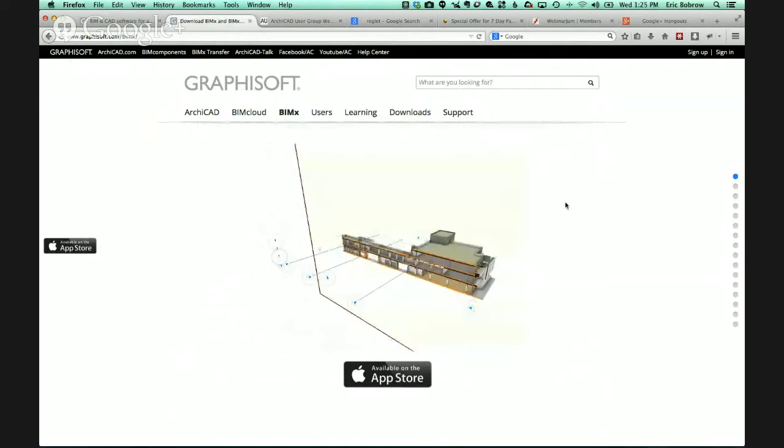I think here in the US, we're not going to go anywhere fast. In other words, we're not going to lose a lot of people and we're not going to gain a lot of people fast. But over time, I think we actually have real potential to grow and become a much stronger presence here in the US and worldwide. There's no question Graphisoft is doing just fine.

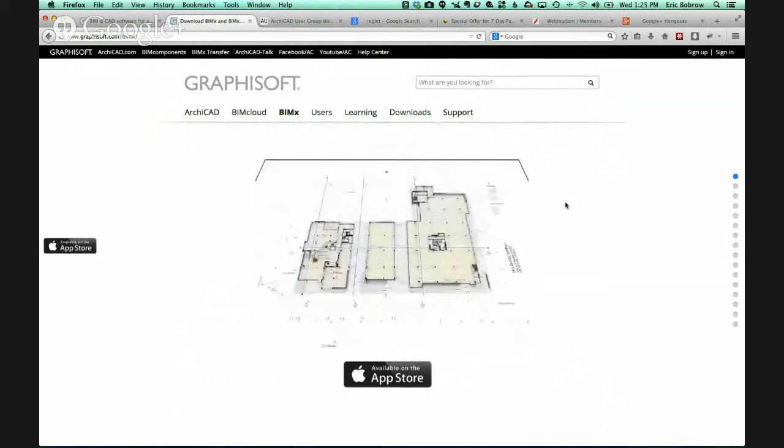If you compare them to car companies, they may not be the Toyota, the number one mass market one, maybe you'd say they're the BMW or something like that. It's not a bad position to be the elite or the best, even if not everybody uses it or can afford it.

And I don't think there's any direct comparison. Are we the BMW, the Mercedes, or what company are we? Even in terms of operating system, are we the Mac to Windows, with Windows being the dominant player, but Apple now being seen as a more successful, innovative company than Microsoft, at least by some people. I don't know.

I don't think you can make a direct comparison, but I think all of us, if we hang in there together and take advantage of what ArchiCAD offers, we're going to have a great journey and be able to serve our clients and create great designs with this tool. So that's my take on it, and maybe a little bit of inspirational talk.

Now let's look at... Oh, I see a comment from Kenneth: I've used Revit and switched over four years ago, it's the best thing I ever did. Well, that's great, thank you Kenneth.

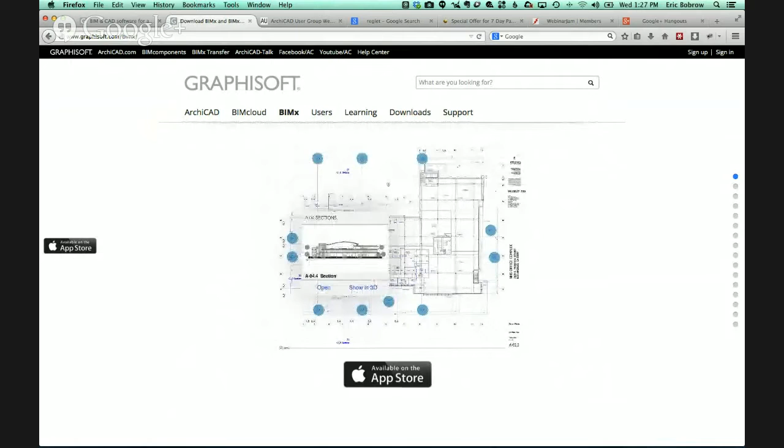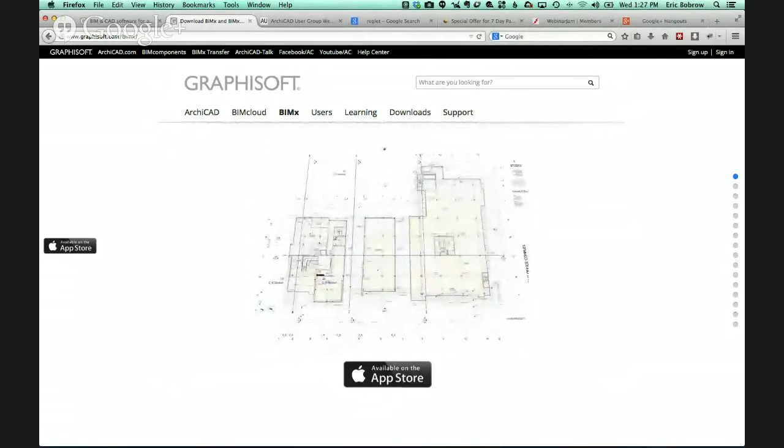Another question from Gordon: there was a note on the install of version 17 that it would be the last version to run on Snow Leopard. Will that be the case? I believe so. If you're a Mac user on Mac OS 10.6, Snow Leopard, version 18 will not run on that. In fact, I'm not even quite sure whether Lion, 10.7, is supported - I can't remember about that. So you'll have to check the Graphisoft website to see the requirements.

But fortunately, if you're a Mac user with a reasonably modern machine, the upgrade to Mavericks, the current Mac OS, is free. So literally, if you're on Mountain Lion or Snow Leopard, you could just download and install the current operating system. So that shouldn't be an obstacle that way. All right, so let's see.

Got this, the ArchiCAD thing here. Let me just put it back to the main one. I don't want to have this animation running in the background for too long here, so let me just switch gears to the ArchiCAD user group website.

This is something that I set up without a lot of fanfare back in maybe February. It is a resource that is free and will always be free.

The front page shows the most recent stories on ArchiCAD. I've been adding references here whenever I notice a story about ArchiCAD, but if you're logged into the site, you can submit a link yourself. If you click on submit a link, it'll just ask you for the link, you click submit, and then it'll ask you for a few details.

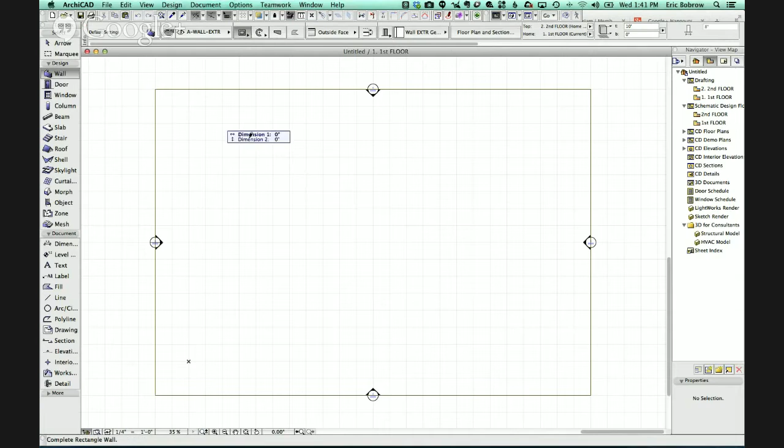Let me just go and bring up ArchiCAD here. We've got just an ArchiCAD empty file, new file here. I'm just going to draw a box and put in a window and a door, and then I'll go to 3D and take a look at it.

He's asking about putting in a reglet, which is a groove in the wall, often used for flashing. So you create the groove in the wall. Right now these walls are just made out of generic materials, but might be masonry that you're carving the groove out of, and then you install the flashing in many cases into that, so it has something to hold on to and be glued or adhered.

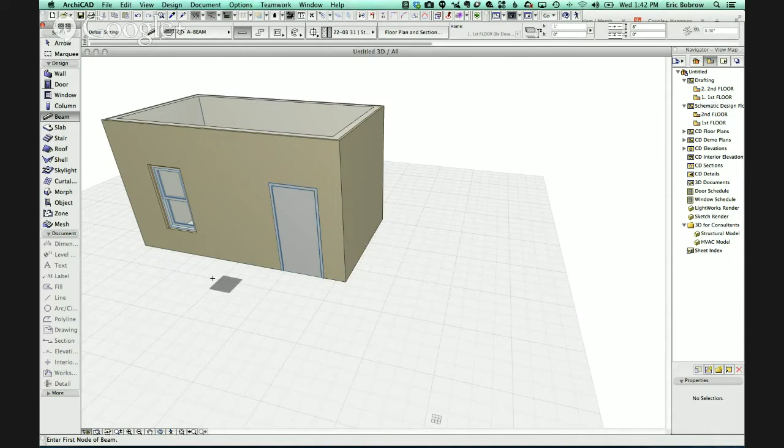So how would you do that? Well, the obvious answer for me would be solid element operations. We could create an element out of a variety of tools. Now I'm going to use the beam tool, and I'll just demonstrate. First, if I draw a beam on the floor plan here and move this, let's rotate this around, and I'll drag this horizontally. Now it's starting to overlap the wall, and then I'll drag it vertically here. Now it's sticking into the wall.

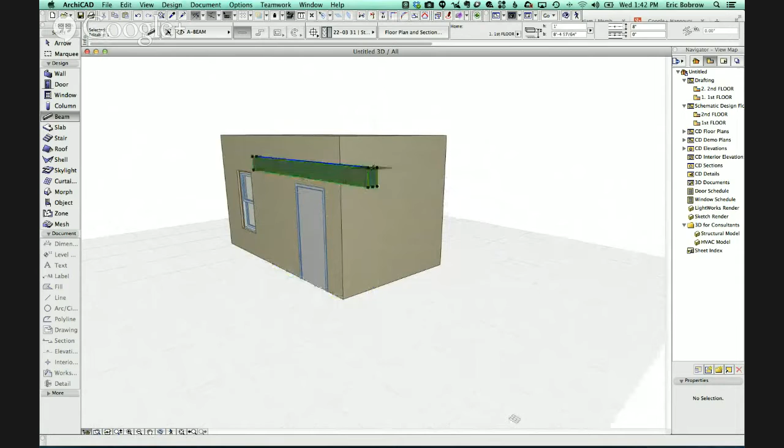Okay, so now this beam, what is it made of? Well, I didn't pay any attention - this is a new file based on the ArchiCAD template. It's made out of structural concrete. Now in ArchiCAD 17, building materials have priorities, and therefore structural concrete is certainly a very hard surface or hard material, and in general is going to be stronger than many other things, so it's probably going to be stronger than these other materials here.

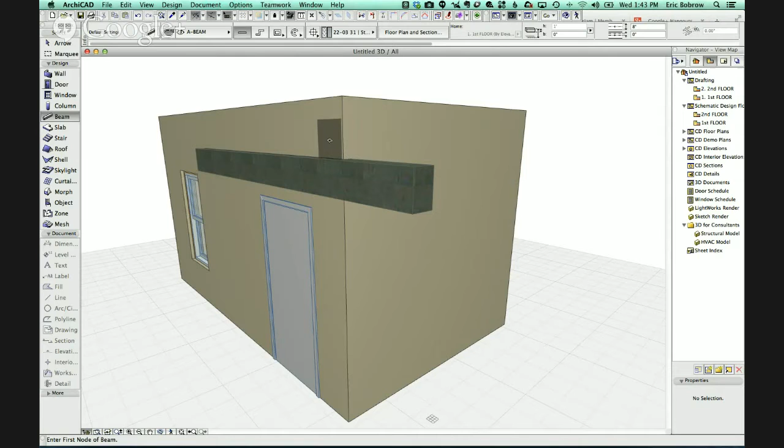So what does that mean? If I select this and rotate around, you can see the green line just faintly passing through there. It's actually sticking through the wall. Now if I select the wall, on the other hand, you can see the green line is cutting itself around.

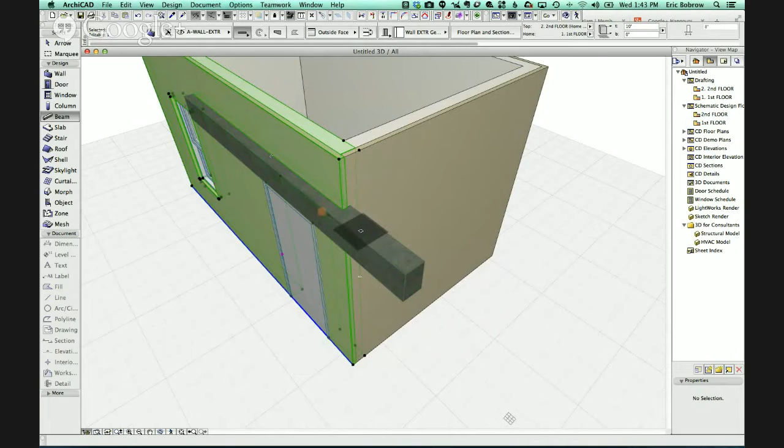So there's a hole in the wall. Now, of course, we're talking about a groove, not a bump out or something sticking out. So what would we do? Well, if I do this, it creates a groove or a hole. If I delete it, the hole goes away, but I could go and hide this layer.

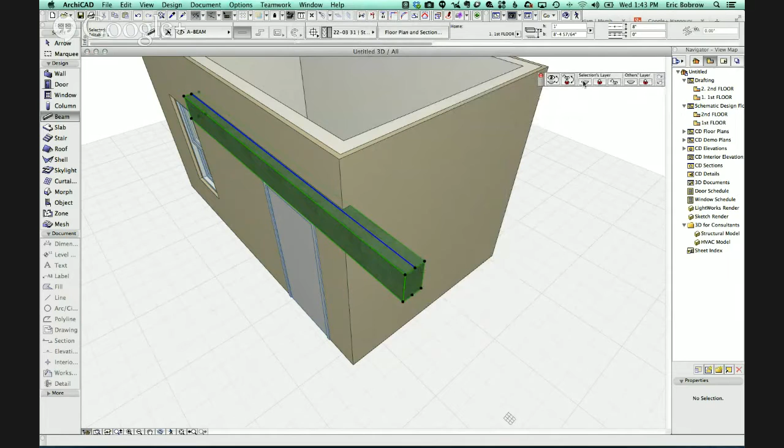So let me go to the window palettes here and use quick layers. Quick layers is one of my favorite tools here, and let's say hide this layer. You can see there's a groove.

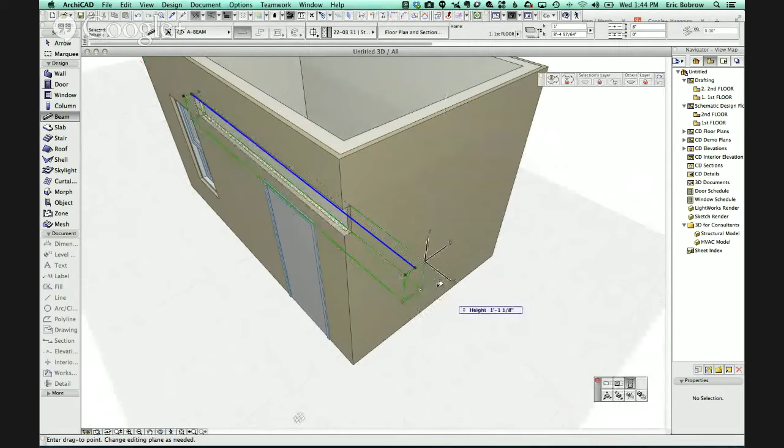Now instead of hiding it, if I undo this and go to the layer dialog and make that layer wireframe, then we can see through it, and that means I can easily select it and change, perhaps change its height, maybe make it shorter. Let's say 1 inch here, and also change how wide it is, make it narrower, and now you can see that we've got this groove in the wall here.

So in ArchiCAD 17 you can do that with the beam tool and then just hide it instead of having it in wireframe. If it's a simple little groove, that's perfectly sufficient, and you can put them around the building very, very quickly.

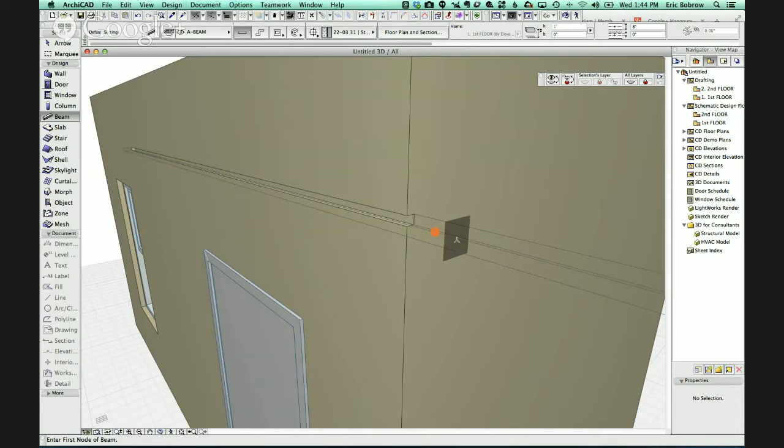Now in previous versions of ArchiCAD, the beam tool has a priority that you can manually set, and so by changing that priority value, you may make it stronger than the wall, and then it'll cut a hole in it.

Now the beam can be rectangular like this. Of course, beams can be other shapes. We can pick a shape. Here, this is a custom shape based on the current size, but I could pick something else. Let's pick one.

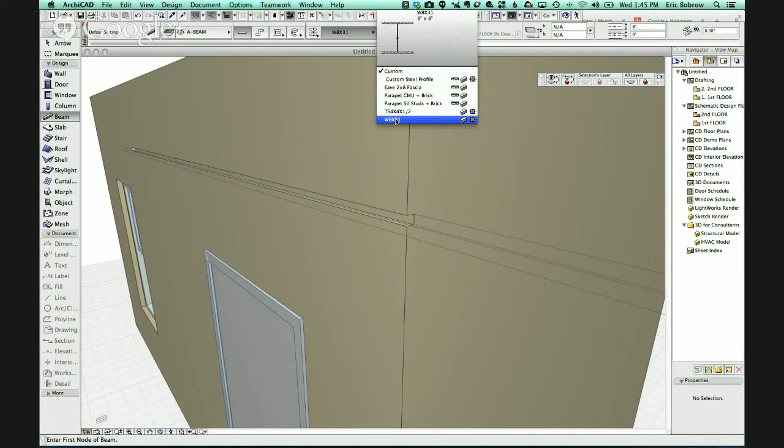Now here's a piece of structural steel, and you can see... Oh, actually, I have to select this element, and then I can change that. Now you can see that it's got two grooves.

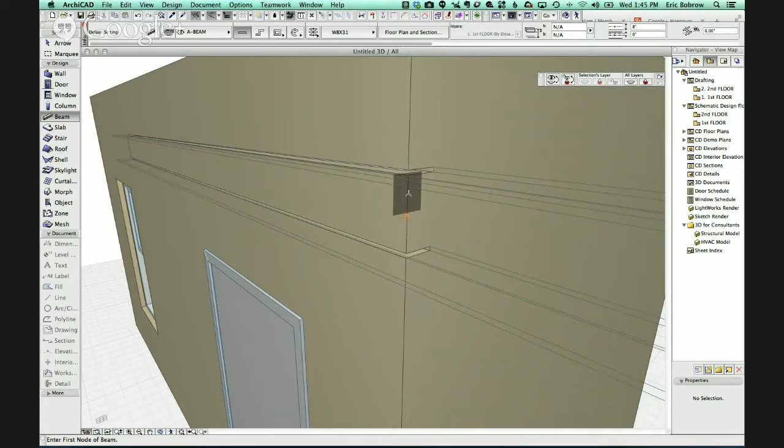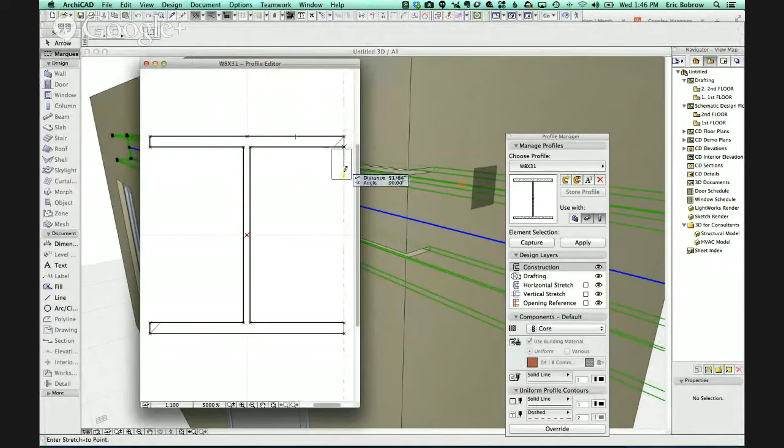So if we select this and edit the complex profile, we could literally change this. Let me just do something arbitrary—I'm going to drag that down and drag this up or something like that. So I'm doing something really arbitrary here, but let me apply it. This is the new shape, and you can see how the groove is now a different shape. So basically, using complex profiles with a beam would probably be the simplest way to accomplish what Jack was asking.

So I hope that is clear enough. I see a comment from Jonathan: make it a horizontal pipe.

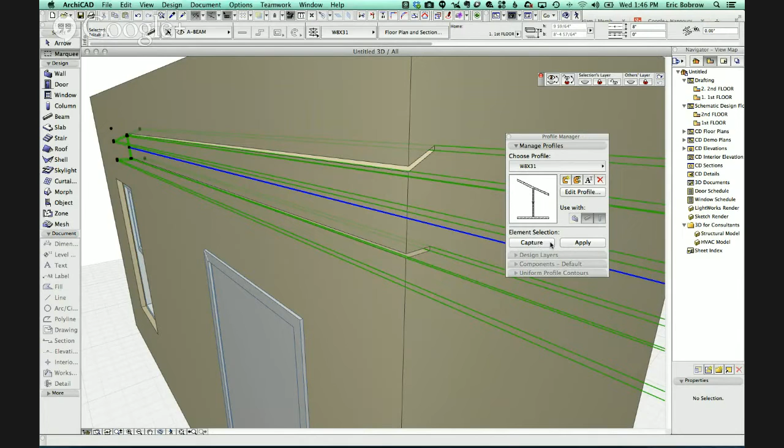So in terms of a pipe, if we were to go edit that profile, let me just delete everything here in the profile, and let me do a fill. Actually, let me do a circle here. How big do we want this? I'll just make it a 2-inch diameter.

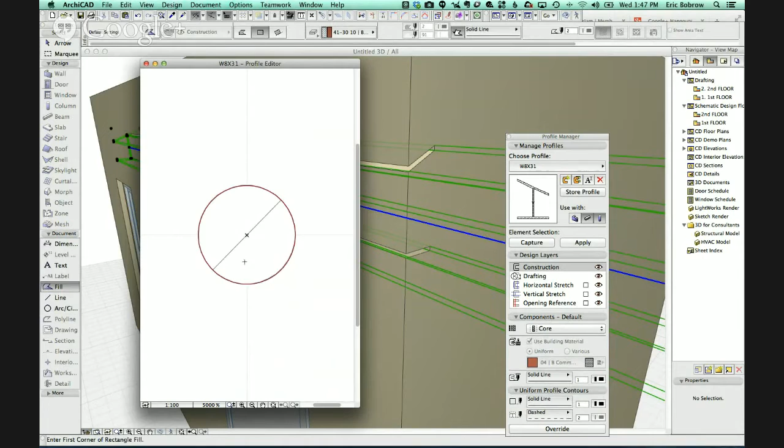Now, as a 2D element, it won't be seen, but if I fill it here, and this is now filled, and I designate it as something like concrete, now it's going to be a solid, and I'll just store this. You can see how it's changed, and now you can see how it's got a curved shape. And we are seeing the facets in the beam itself.

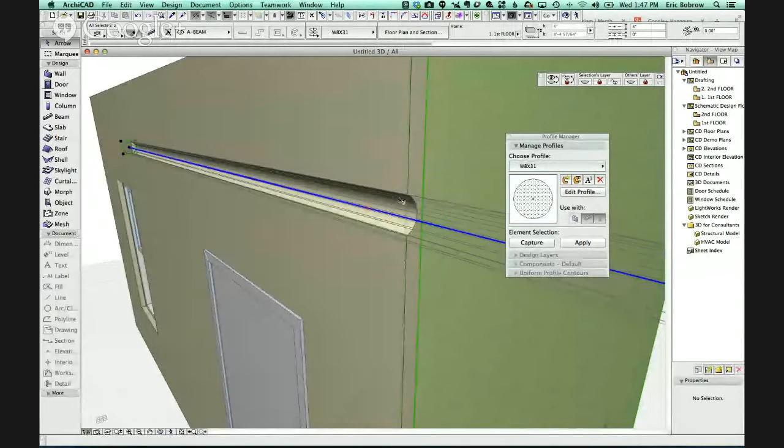But as soon as we hide that—whoops, let me undo that, I guess I had more than one thing selected. Here, select that, hide it. There you go, you can see how smooth that is. So I hope that answers this.

Ken writes, Eric, I think you wanted to go both vertically and then horizontally, again at a different height. Well, obviously you could create other things like a column going vertically. So the idea is you create something that's going to cut the hole, and then you either use the building material priorities in ArchiCAD 17, the manually set intersection priorities for beams in ArchiCAD 16 and earlier, or solid element operations under the design menu.

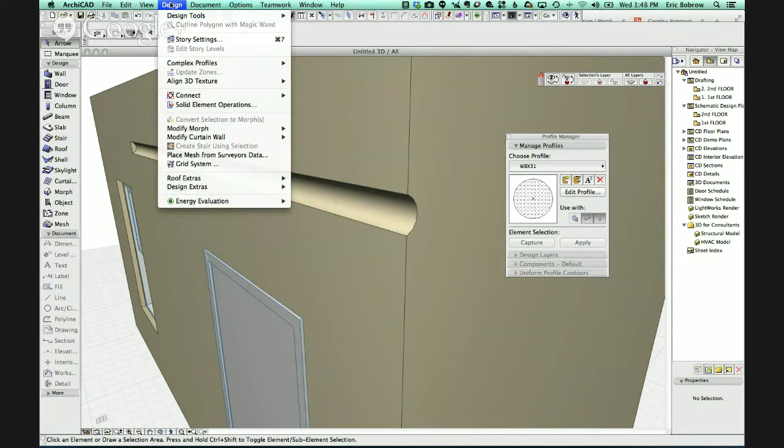If you're going to do any other things, you could take any type of element, a morph element or an object, and create that. So I need to do quick answers here because I want to cover a couple of other things in this session, and then I have some final announcements, and try not to go too much over an hour.

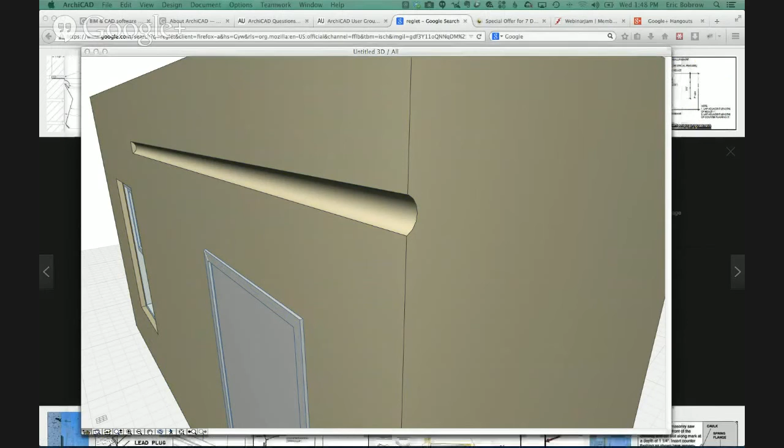Okay, so we have a question from Ben Jacks. Ben is a new ArchiCAD user, and he is actually a teacher at University of Miami in Ohio, I believe.

He says, I'm struggling to understand some essential things about layers, views, layouts, and publishing. I'm in way over my head, and I don't understand how layers work and how model view options work, and why certain things show sometimes and not other times. There's a lot of options and controls that interact in ArchiCAD that can be confusing.

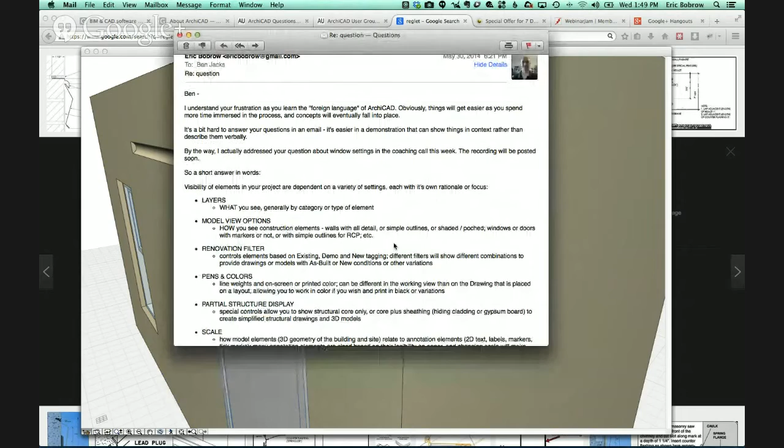So I took a little time to write a short answer, and I'm going to post this on the ArchiCAD user website. Even as a relatively proficient user, you may find this useful as an overview. I'll just read these off and elaborate a little bit on what I wrote.

Layers control what you see. So you can turn on and off groups of elements like all the furniture or the landscaping or interior walls based on layers. They're categories of elements, and they're flexible because you can assign any element to any category.

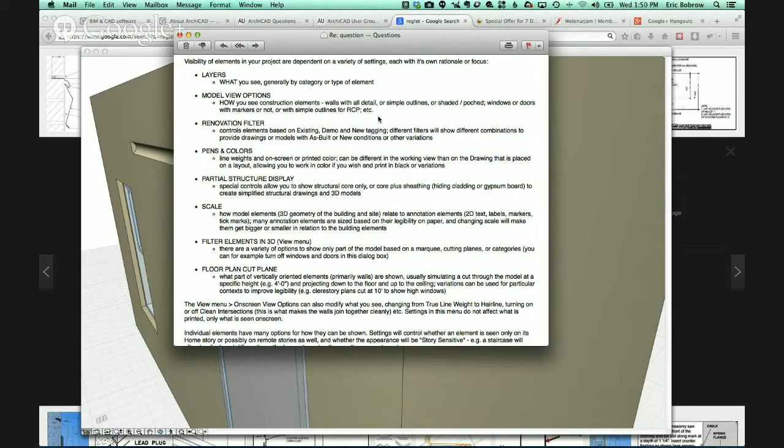Model view options say, how do you see them? So if the walls are showing, are they showing with a lot of detail, or are they showing as just simple outlines or shaded? And windows or doors, if they're showing, do you show them with markers or not? Things like that, or simple outlines for reflected ceiling plans.

The renovation filter allows you to choose elements to show or hide based on whether you want to see existing and demo elements or existing and new, so different phases of the building. There are some options for overriding the normal look of things to make them stand out, so you can have demo elements with dashed lines or in 3D colored in red or some other color.

Pens and colors affect those elements that are shown. It affects the line weights on screen and when you print. You can have a different pen set that you're working with in your model than in the documentation, the drawings on the sheets, because you can work with colors in the model since it's convenient to see different element categories in different colors. But on the sheet, the drawing, you can override that and say I'd like to have all of the pens in black, or the main pens in black and others in color.

Partial structure display allows you to change whether structural elements like walls, slabs, and roofs will show entirely, or you'll only see the structural core, or there's a supplemental or intermediate view where it's taking off the cladding but leaving the core plus the sheathing. This helps you communicate with your engineer to create structural drawings or structural models, because they don't want to look at the exterior or the non-structural stuff.

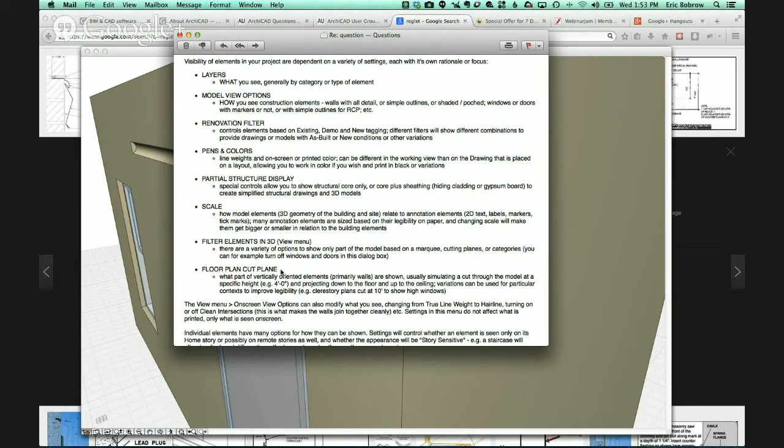Finally, at least on my list, the floor plan cut plane affects how the model looks on the floor plan, because usually you want to cut at, I'll just say chest level—4 feet or 1 meter or something—but sometimes you want to show the walls up high, like in a clerestory plan, to show the high windows, so you can change that. Or if you have split level conditions, you may want to show different cut planes in different parts of the model.

Separately from all of these, which affect what you see and what you would print or plot, the View menu's on-screen view options also modify what you see. You can go from true line weight to hairline, turn on or off clean intersections, and other things. As the name implies, they affect only what you see on screen, but not the output.

So even if you have true line weight turned off when you're looking, if you print, it will be with the weights. There's a separate control when printing to say I want to print in hairline, which is useful if you just want a quick printout to mark up.

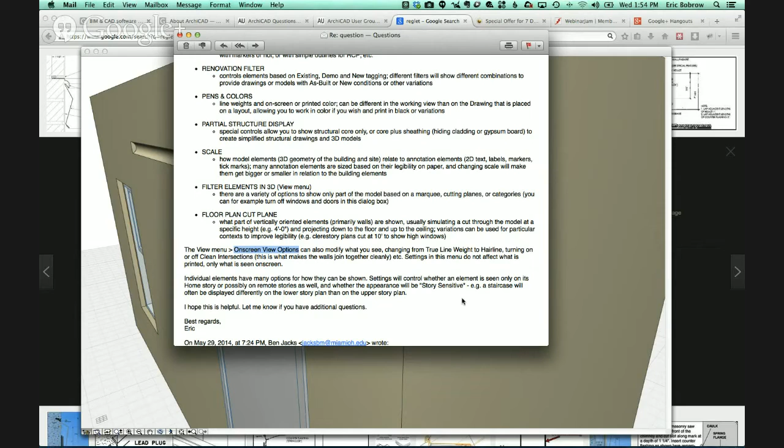Now, individual elements have controls. Of course there's the general settings of how big they are, and what element they are, which object this is. But there are also controls related to the pens, which give you the thickness of the lines, and more sophisticated controls such as story sensitive. A staircase will be displayed differently in many cases on the lower story, where you might have a break line, than on the upper story plan, where you'd see the entire staircase.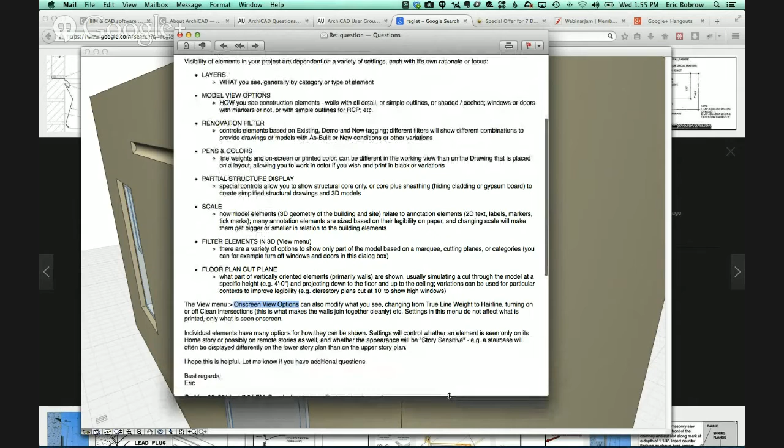So this is, in a very short summary, all of the things that I could think of that affect what you see and what you print from the model.

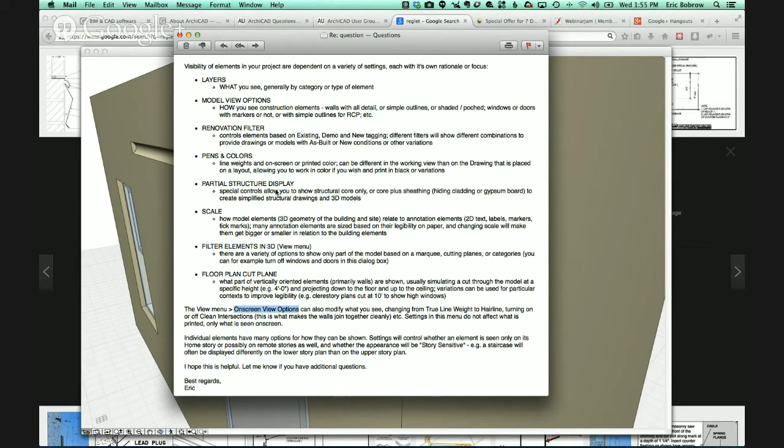Now, if you think about it, we just use these in context. When you create a construction document of the floor plan, you have certain layers turned on, certain model view options. You're choosing is it a demo plan, a new plan, or existing. What pens and colors—probably most of your drawings are going to be one set of pens and colors, but if you're doing a special purpose thing for an engineer, you change it to show the core of load-bearing walls and things like that. So all of these things we just use in context.

But where this can get confusing is when he wrote here, I've been completely baffled because I had some lines on that layer which did not show up on the furnishings view, even though other lines in that layer do show up. So he was saying, I can't see certain lines—how'd they get turned off?

Well, it turns out that the lines he was referring to were inside the walls. They were skin separator lines, and when the furnishing plan views had the option of presentation solid selected, it meant the walls were shown in solid form. Actually, as I read this again, that's not exactly the case—he did have presentation solid selected, but the lines themselves were not from the walls.

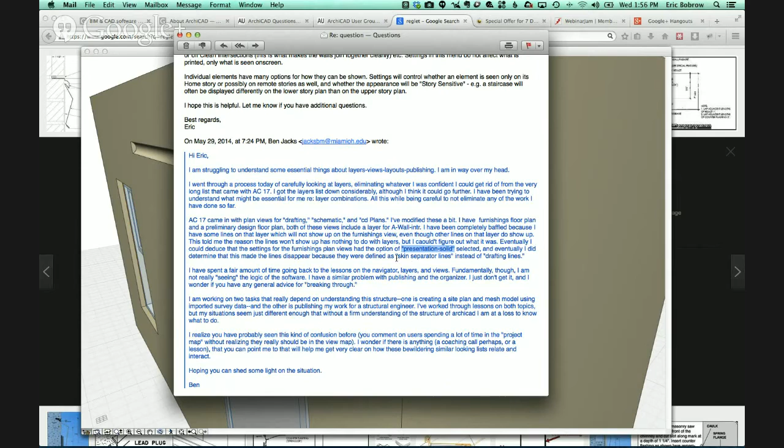They were separate lines, and this is a tricky thing: if I draw a line, I can choose what category it is. This is really odd—why is the default a skin separator line? I just opened up a new project with the standard US template, and I would think the better default would be a drafting line. A drafting line will always show as long as its layer is turned on, whereas the skin separator line can be hidden.

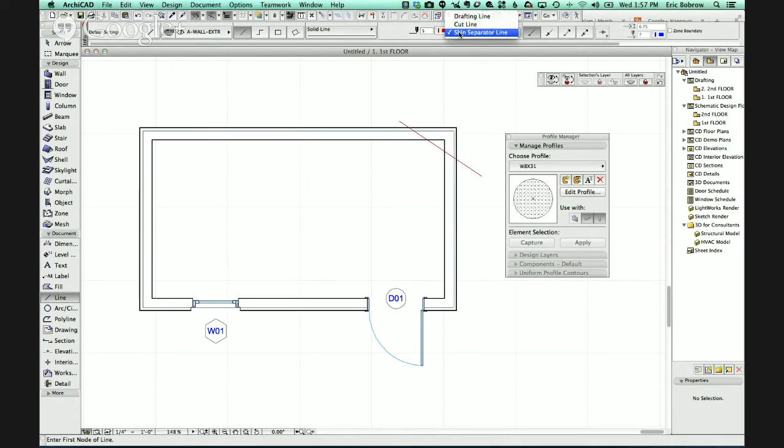So if I draw two lines—I'm just going to draw a line here, then switch to drafting line and do this line here. Zoom in on it, switch my model view options, open up our quick options, and switch this from drafting plus fill to presentation solid. You can see that the walls now are shown in solid, but hey, that line disappeared.

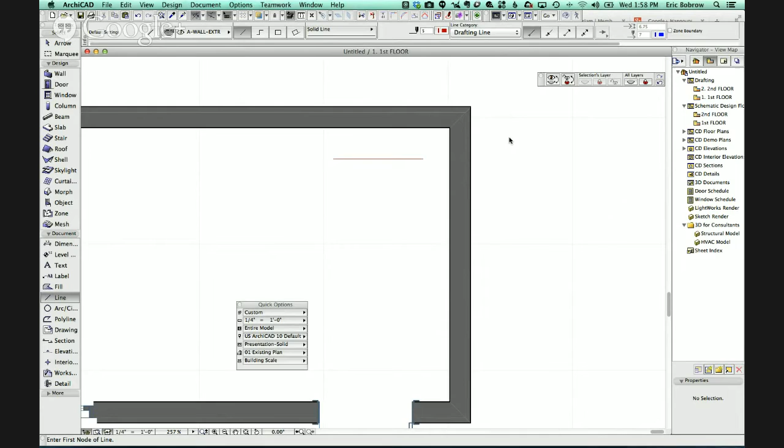So I can understand why he was mystified—why, when I show the furniture plan, which has a simple version of the walls, do these lines disappear? I didn't change the layer. So hopefully this reference will be useful. Certainly it's my aim to demystify ArchiCAD and help you have the tools you need to get your work done, and if you have a problem, be able to troubleshoot it.

Okay, so we are at almost the hour mark. I'm going to do one more quick demonstration here, and that is for split levels.

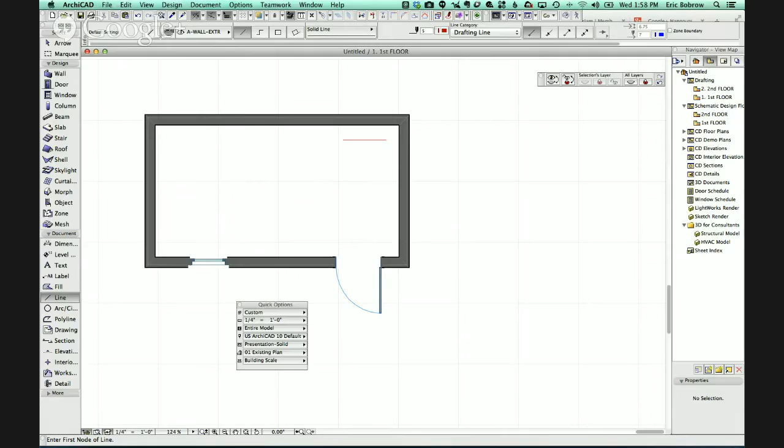This is a question that I don't think will get a sufficient explanation, but Carol Bochsler writes: we have a house where the ground floor spans 3 different levels that are 1 meter height difference from each other—so 1 meter would be about 3 to 3.5 feet. And they made each of these a different story. So basically, even though one level to the next was like half of a typical story or less, they put them on different stories so that they could have the height markers.

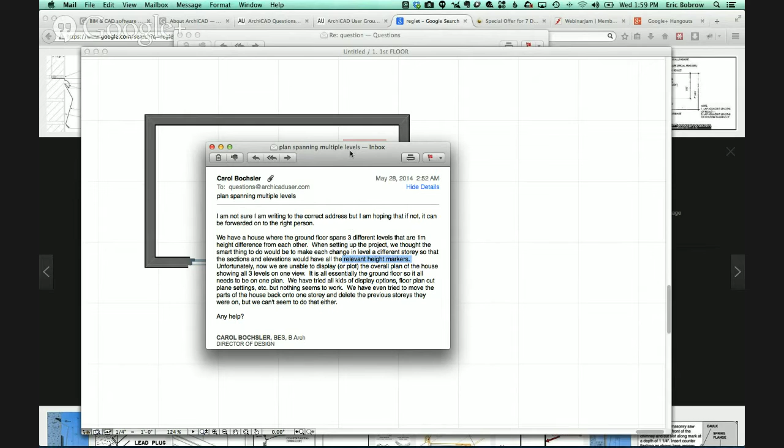So that meant in an elevation or a section, they would have automatic story markers showing. But now they can't display or plot the overall plan of the house, showing all 3 levels on one view. And they've tried all sorts of things. So what should they do? I'll try to do a quick little sketch here.

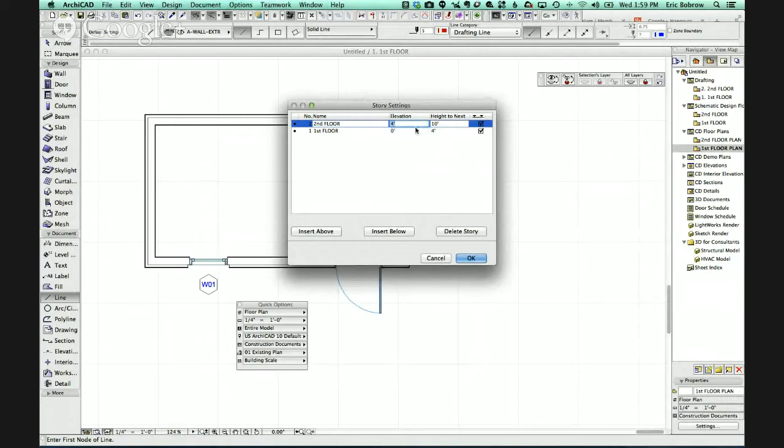Let me put this back to our floor plan, and let's go to the story settings. We'll say the second floor goes up 4 feet, just to make it easy—a little more than 1 meter. And I'll go up to the second floor. So I'm on the second floor now.

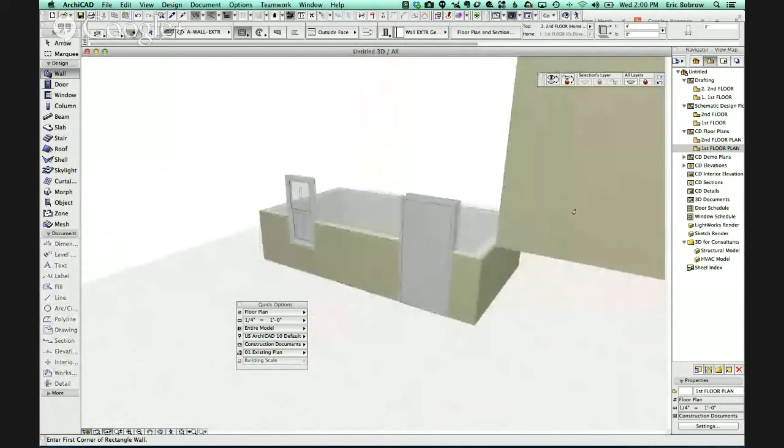Let me just make sure I can see the first floor with trace reference, and I'm going to be totally arbitrary and draw another set of walls here. So now these walls, if we look in 3D—somehow, I don't know why—oh, that's interesting. Why did these walls get trimmed?

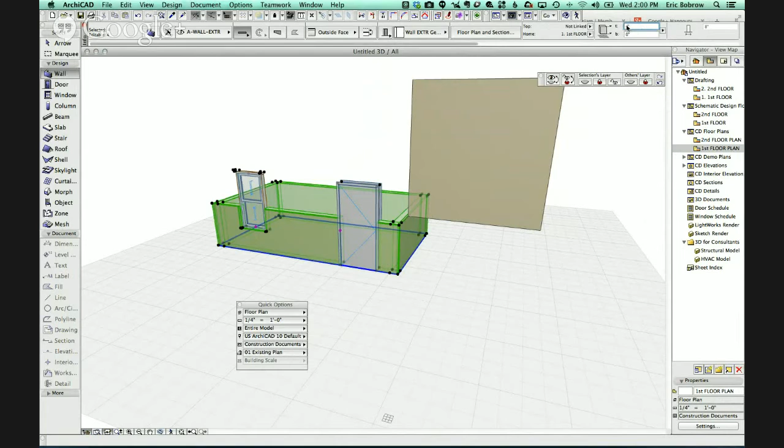That's a really interesting question. These walls in ArchiCAD 17 have a setting that their top is linked to the next story up. And of course that's very useful, but in this case we wouldn't want that at all because the next story is a partial story. So we'd say not linked, and we'd set them up to 10 feet or whatever. So now we do have a split level condition here.

But obviously we're only seeing one story here and one story there. If I turn off the trace and reference, it disappears. And in fact, we can't actually work with these walls—it says that it's inactive.

Now, one way you could get something happening here is we can go down to the first floor—for those of you outside the U.S., that would be the ground floor, story 0. I'm going to select all of these walls, and I'm going to say I'd like to show them not just on the home story, but all relevant stories. So now if I go up to the second floor, you can see that they do show here. So that's one partial solution.

Now in some cases, you may find that, let's say this window here is not tall enough to show. Let me just make it a little bit shorter here. If its head height is 7 feet, and remember this is at 4 feet, let me just make this a really short window—we'll say it's only going to go up 4 feet, and the header to story 1 is at 4 feet.

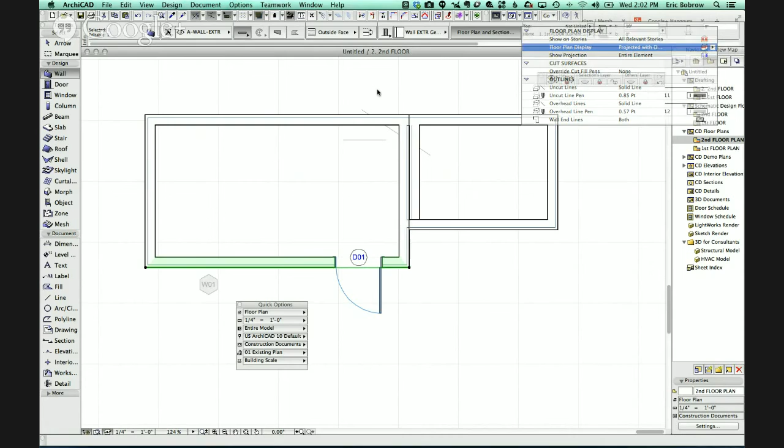We could change this and say I'd like to do—let's see, okay, I guess you can't do symbolic cut when you have it showing on multiple stories. So that is an issue here. Let's see if we go to the window, and can we make the window show? Oh, it is symbolic. All right, so we do have an issue here, is that in some cases the window or door that we want to show, we want to have a combined drawing, isn't showing because it's out of range. And so how do we deal with that?

Well, one option that I would consider—here are 2 options that I would suggest. One is putting these on the same story, so that basically you just tell the walls what height it is, because remember, when you select or place a wall, you can say what base it is, relative to the story, or overall in terms of sea level or some other altitude. So here it's 0 at the story, but we could specify it as relative to project 0 or some other height. So I don't have to have this there.

So let me go down to the first floor plan, and we'll just say that—oops, I'm going to draw some walls.

Let me draw a box here, get rid of this little piece, and select these walls. We'll say that they're raised up from 2 feet, unlink it here, and take it up to 10 there.

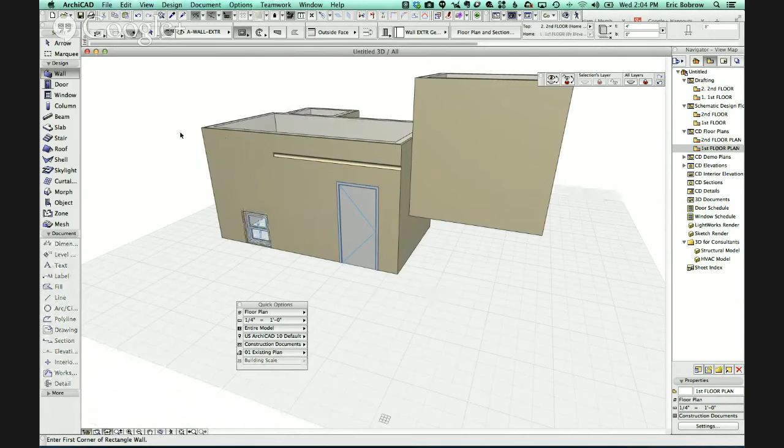So now if we go to 3D, you can see that these walls are a split level. We can basically put the walls on the same story just at whatever height we need, and they will automatically show. So that would be a general recommendation: put it on the same story, just raise it up whatever height you need using these controls.

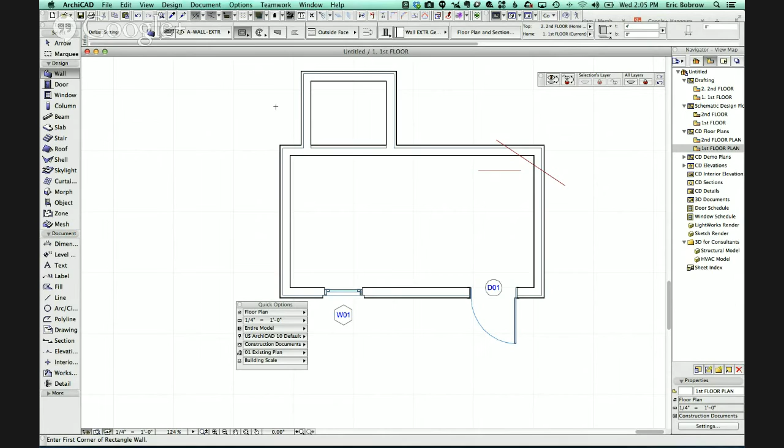And then what you'd want to do is also make sure these walls, in this case the simplest is to make them show symbolic cut, because regardless of the heights of the doors and windows, they will show up nicely. You're saying just give me a symbol for the window, don't actually cut through it. So that would be another option that would work nicely.

And then the final option I'll sketch out is that we could take this view and make these walls not show on both stories, just for now. So we'll say show on home story only. Now we're going up to the second floor here, and you can see the difference.

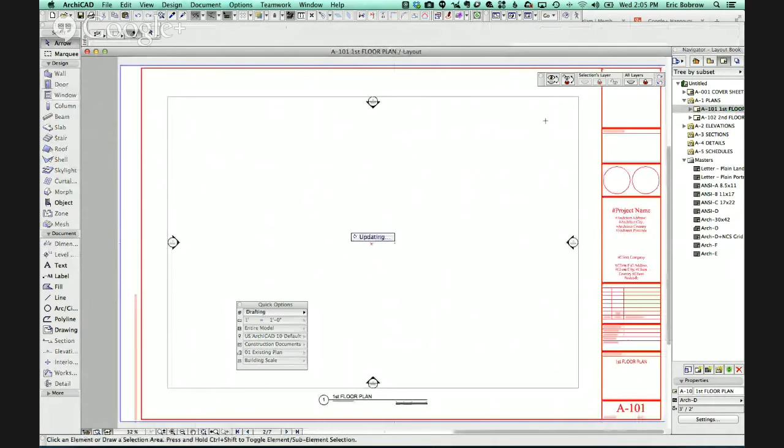So what I'm going to do is actually put onto the sheet. I'll go to our floor plan sheet here, and you can see here's this lower section. I'll use the cropping in here, and then move the second floor onto the sheet, and I guess this second floor, maybe we need to say that it's fit frame to drawing.

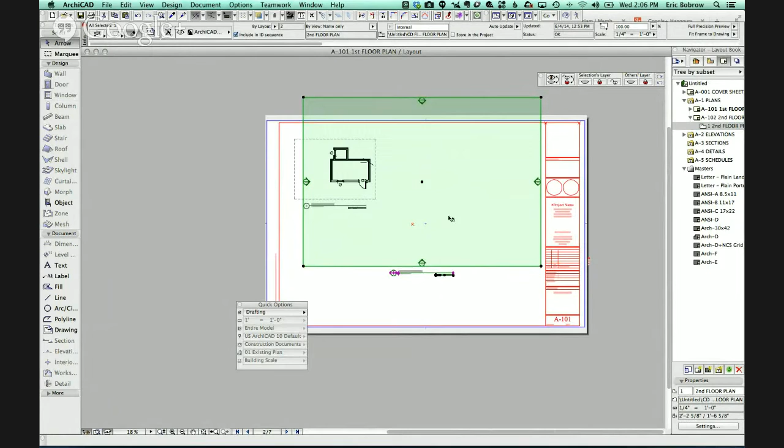Oh, okay, why are we not seeing the second floor here? You open the source view. Here is the source view, and here's the... oh wait a second, I guess I didn't drag it onto the sheet. No, there. Oh, there it is, okay, it just hadn't updated. So let me get rid of one of these two copies here.

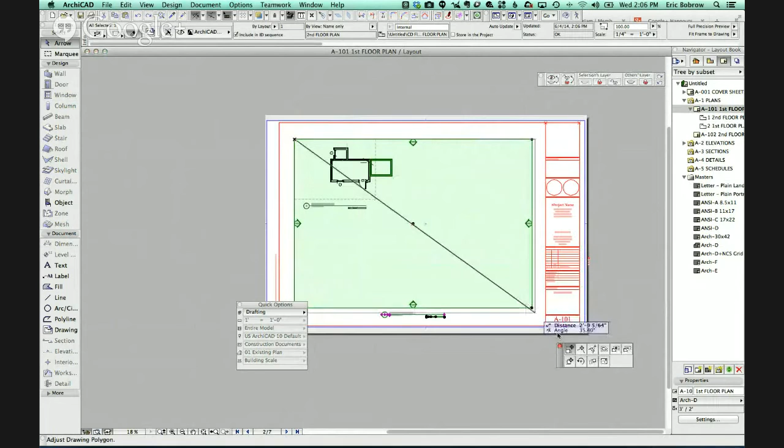So now what you can see is that if I drag this away, I've got two different drawings on the sheet. But as long as I align them carefully and perhaps crop them like this, you can see how it looks like it's one drawing.

And if I turn off the title for this, so if we scroll over here and say that I want to have no title, then it'll look like it's one drawing. And if I turn off the drawing frames, then it really does look like one drawing.

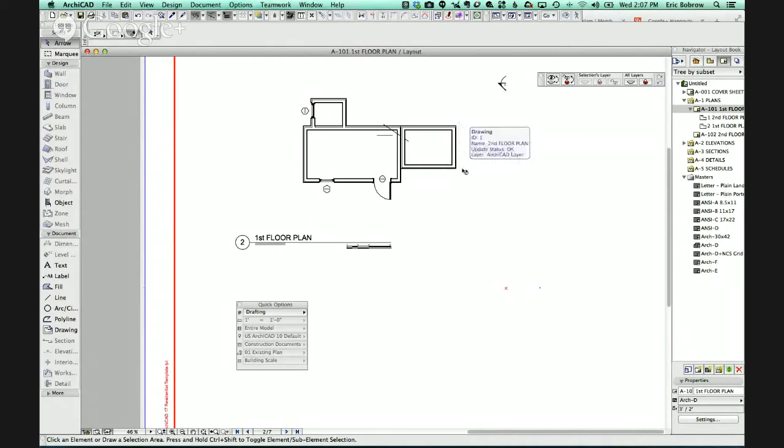So whether these are on different stories or different cut plane views of the model, you can combine more than one view next to each other to synthesize the story. So those would be my two main suggestions: either have them all on one story and move the walls to the right heights, or if you need to have them on other stories, you can combine them on the sheet.

If you do have them as separate stories, you'll only be able to see the trace reference for one story at a time, because trace reference can show one view or another, but it can't show both the story below and the story above. So there are some limitations.

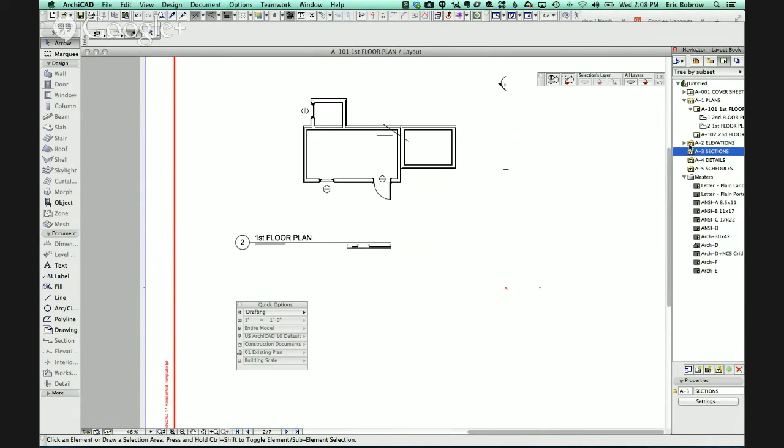And then if we do go to the section or elevation here, okay, so here if we open this source view, we can see some levels that are put in. One thing you may want to do is, instead of, if you only did it on one story, you wouldn't have the second floor here. You just might want to manually draft this up, put in a dashed line and text and things like that for the story marker.

Or the elevation for the stories. So that way you've got it all on one story, it's simpler to work with, and then in the elevations or sections you just manually draw something that looks the same style as the built-in story markers. Okay, so I think that hopefully answers this question from John.

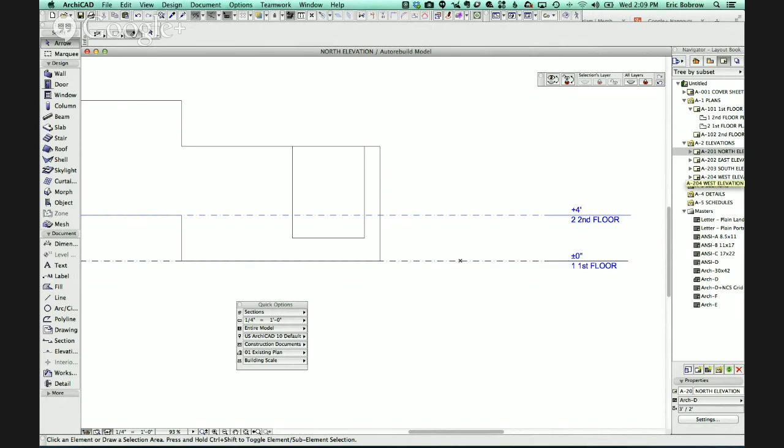Can the cut plane be changed or set per story? The cut plane is set per view. In other words, when I'm in a view, like this first floor plan here, and I go to the settings, there is an option for the cut plane settings at whatever height you want.

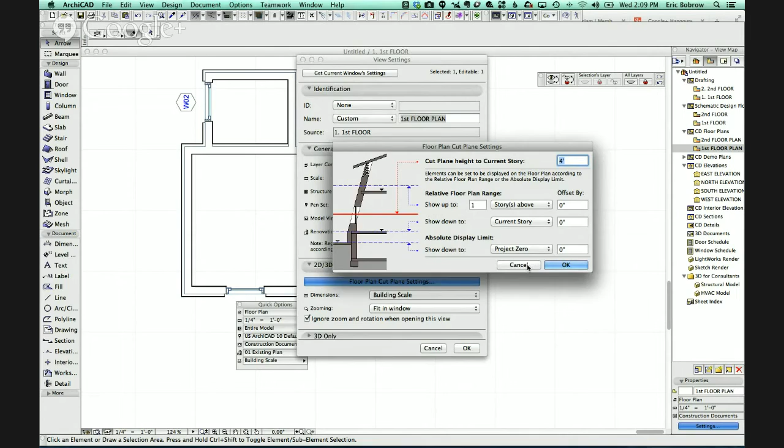And that means that you can have a view that's the clerestory plan of just the upper windows, that's up at 10 feet, and maybe the story is a 12-foot high story, and the cut plane is up at 10 feet, that would be, let's say, 3 meters, something like that. So each view can have its own cut plane.

Ian writes that he quite often does split level houses, and his preferred method is to build up a composite floor plan with several drawings, one for each level, onto one drawing sheet. That's exactly what I just presented, so I'm glad that works for you.

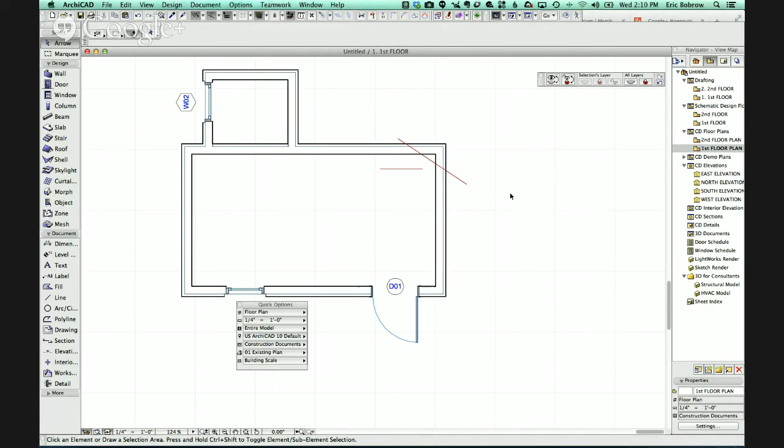One has to do with the public BIM server that I mentioned, and this is sort of an early announcement because I don't have anything to show very much. I don't have it up on the ArchiCAD user site yet, but next week I expect to announce how you can use a BIM server that I will be managing to share your projects. There will be a charge for it because it's going to take effort to set up, run, maintain and support, but it'll be a very nominal amount. I'm looking at about $100 a month, $97 a month.

That would cover a firm with up to maybe 5 people and 2 or 3 projects - not per project and not per person, just a flat rate - and then maybe a little bit higher for a firm that wants more, like 5 projects or 10 people. So it'll be a membership site, and the BIM server itself will be free to members. This is a way to work around the Graphisoft licensing, which says the BIM server cannot be sold directly - one can't offer access to it for a price - but I can offer access to the website member area for a price, and then members get free use of the BIM server. So look for an announcement next week on that.